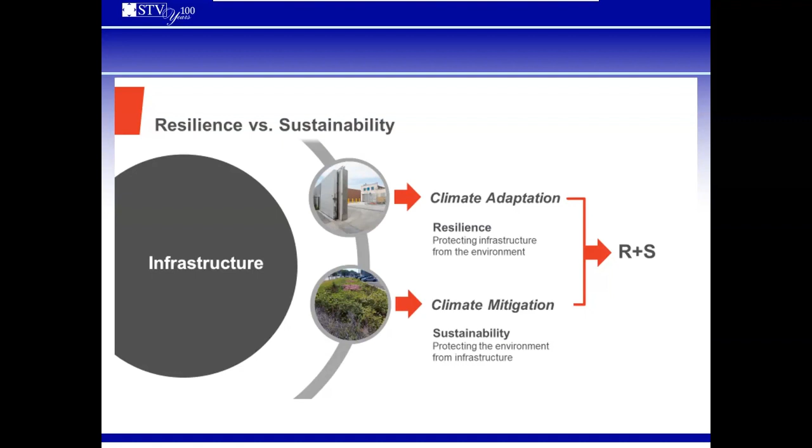That's what we'll talk more about today—that idea of sustainability, how we as engineers can design buildings to be environmentally friendly and have the least impact on the environment.

STV does resilient design. We're dealing with a variety of different issues we design for. Some are climate conditions, such as sea level rise, which is the most common one talked about now, tidal inundation, or drought. There's hydrological events—flooding is the one that comes to mind this year. We've seen massive floods throughout the world, and even in New York City we had recent flooding just a few weeks ago that impacts all of our lives. And then we had Sandy, Hurricane Irene, and Ida. There's been a lot of recent flooding and extreme events we should be designing resiliently to protect against—natural disasters, hurricanes, and you see much more fires recently.

There's also failures and emergencies—we deal with this quite a lot. Environmental contamination is a very common topic. Back in the 1940s and 50s, when an industry was manufacturing something, say paint or chemicals, a lot of times they would manufacture it in the plant, and that was the boundary of their system. Then they'd have a pipe that would drain the waste out of their system into a different system, like a river, which impacts us all. GE was guilty of this—they disposed, in quotes, of their waste, which was PCBs, polychlorinated biphenyls, a known carcinogen, depositing it in the Hudson River. That's a great example of environmental contamination.

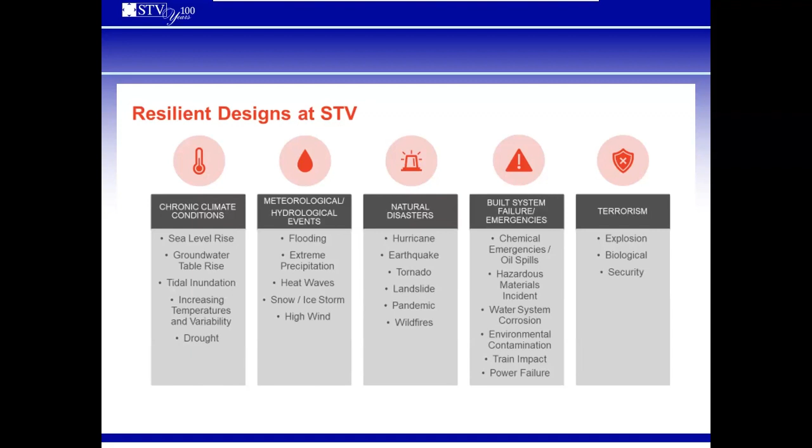And then, of course, there's terrorism. So resilient design is protecting our infrastructure—roads, bridges, tunnels, and buildings—against all of these different factors. Sustainability and sustainable design is designing for these topics too: designing for people, making sure there's good indoor air quality, that we're not exposed to chemicals within our buildings or tunnels. Energy—are we building buildings that are better insulated so we use less energy to heat them? And also buying renewable energy. Energy auditing is a very important factor.

I did this a while back—I got into energy auditing, and we would use various tools to quantify the amount of air exchanges a building had every hour.

So we would apply a negative pressure to a building by putting this big fan in the front door of a single family home, for example, draw the air out and measure the barometric pressure difference between the inside and outside, and figure out the number of air changes per hour, then assign a number to figure out how efficient the building was and how airtight it was. That's an example of energy wasted.

So sustainability also deals with the climate and wetlands. I have a slide about that, as far as how to protect wetlands, and that goes back to the sustainable idea, and back to regulatory compliance and permitting, which is the foundation of this whole topic of sustainability.

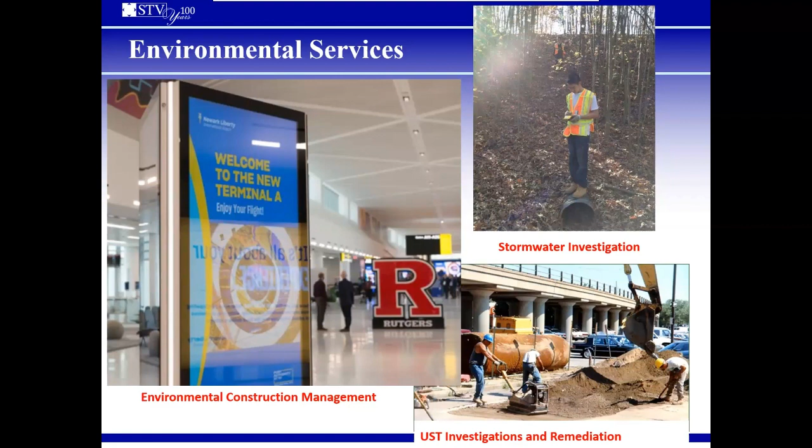So we did delineation of lead to figure out how deep it went in the soil, how far out it went, how far downstream it went. Very interesting project there, and then we advised them on how to clean it up and dispose of it correctly. We also do some work with underground storage tanks and remediation. I think it's a very interesting industry, and I'm still doing it, so it must be something good.

So we'll start off with the phase 1 environmental site assessment. This is the basic type of assignment that we get and advise clients on. We do a lot of this work for the New York City School Construction Authority - whenever they want to lease a new space, they ask us to go in and look for contamination and environmental risk.

Really, the way I see environmental issues is we're managing risk for our clients. And that goes all the way through everything, even sustainability. There's risk involved, there's always money involved, there's always time and schedule. And if you promise your client you're going to get LEED Gold, well then there's money and time associated with that you have to be careful of.

But phase one is the classic environmental risk analysis, and this is a way for the landowner, the property owner, to avoid getting sued under the CERCLA Act of 1980. The purpose is to identify recognized environmental conditions as they exist at the site at the time of the site visit, and to identify conditions that could have a potential to impact development and use of the site.

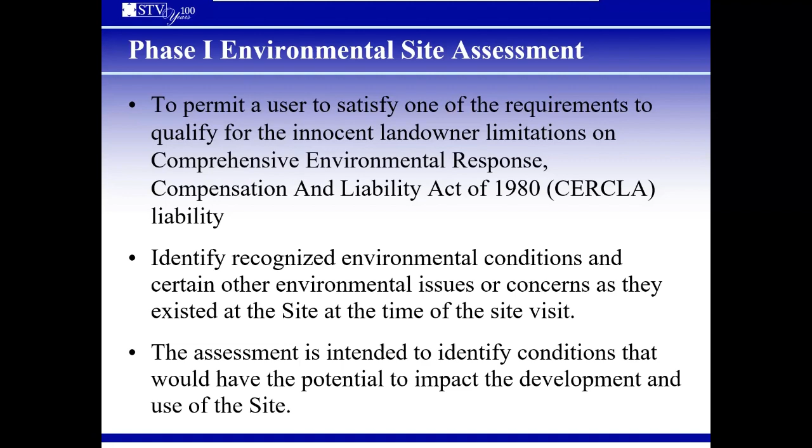If you like history at all, this is exciting because you get to look back - they provide you with maps going back from the present to the late 1800s. And New York City is full of interesting things.

The interesting thing here is that before 1970, a property owner could open up a gas station and it didn't take much permitting. There was very limited oversight, no checks and balances. So a building owner could just buy a tank, hook it up to a pump, and start selling gas.

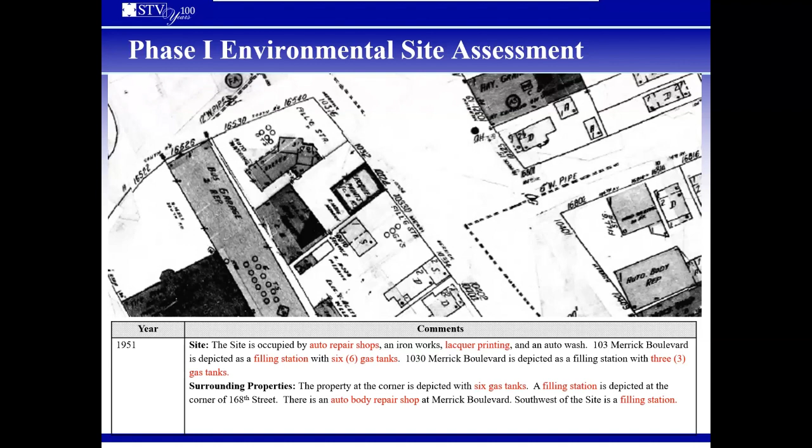You should consider doing additional sampling as far as a phase 2. So once we've identified those recognized environmental conditions, also known as a REC, then we would advise the client and make recommendations as far as what to do next. Typically, that would be a phase 2 environmental site investigation, which we're showing on the screen now.

This is where we then do some sampling. So we hire the drill rig and an operator. We show them where we want to collect the sample, and they drill down to whatever depth we think. If it's an underground storage tank, we might drill down beneath the invert, say 10 feet down. That's where the contamination would be.

They pull up the sample, we collect those samples, send them to a lab, have them analyzed, and figure out what type of contamination is there. Is it a petroleum type contamination in the case of a gas tank? If it was a dry cleaner, you could have all sorts of chlorinated solvents. Those are pretty nasty, and those things don't break down.

And also a lot of these contaminations, once they get down, work their way through the soil, then they wind up hitting the groundwater table. And the groundwater table, if it's pretty shallow, say 20 feet, once it hits the groundwater table, then it becomes dissolved in that groundwater, and it can go in any direction.

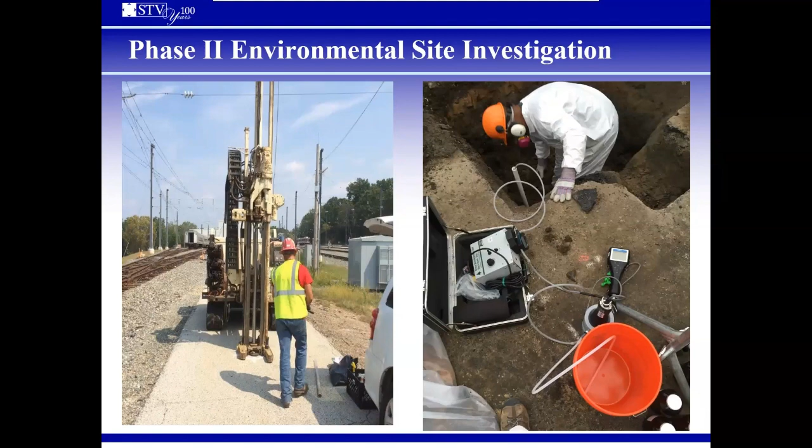And then after we've done the phase 2 and delineated the contamination, we figure out how far down it goes horizontally and vertically. Then we can figure out how to clean it up.

And typically, the most common way to clean up soil contamination is to dig it up, put it in a truck, and dispose of it properly. But we have to know what's in each truck. We have to dispose of it using the appropriate licensed transporters and disposal facilities.

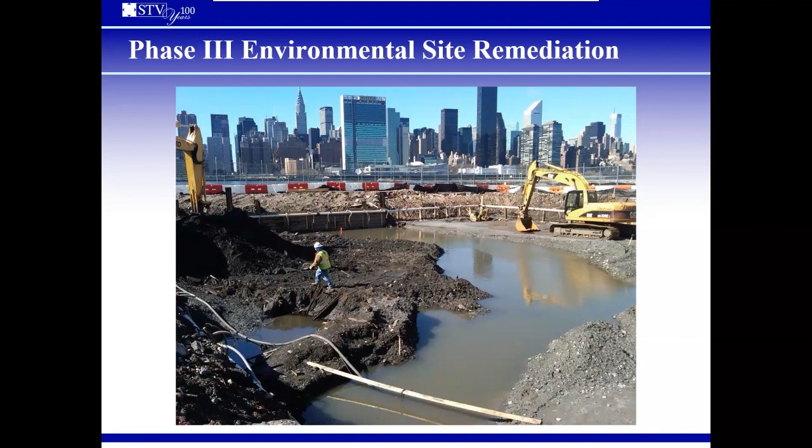So this is one of our sites in Queens, looking west towards the Chrysler Building there. So this is a typical outcome of that project.

So I'll get a little bit into the other types of work we do as an environmental engineer, environmental scientist, and that is considered part of sustainability.

Asbestos is a great material. It's naturally occurring. Believe it or not, there are outcroppings of asbestos in Staten Island. If you drive on the Staten Island Expressway and while you're sitting in traffic, you look to the left or right, you'll see a greenish type rock. That is serpentinite, which is asbestos. And it's also found underneath Manhattan. There's an outcropping there, and you may have heard other presenters talk about it as we built the 2nd Avenue subway and the 7 line extension.

They went through naturally occurring asbestos, and they had to take certain precautions for those tunnel boring machine operators. They had to wear personal protective equipment and take care of the spoils and dispose of it properly. So it was commonly mined, believe it or not, in the U.S. for years and years, and it was until recently mined in Canada.

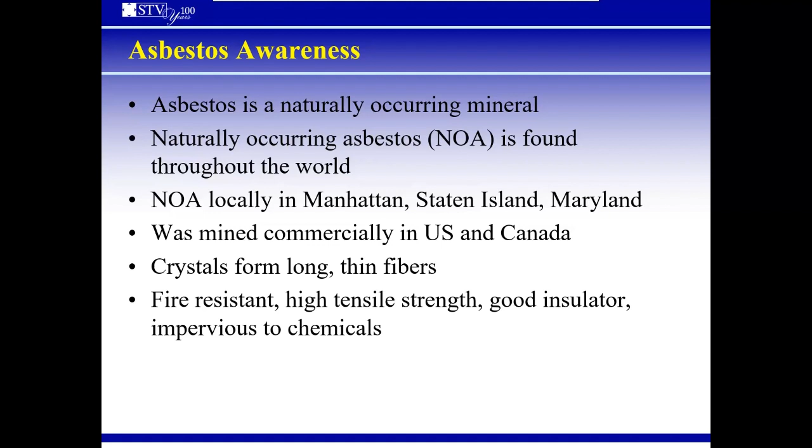I did a project recently in New York City, and there was naturally occurring asbestos in Staten Island, and we had to deal with it. So it's something you may come across in your careers, and you should just be aware of it. It does happen once in a while, and it's pretty simple to deal with. You use engineering controls. In this case, the engineering control is simply using water to wet it down and keep the fibers down so that nobody's being exposed to them as a worker and as a neighbor in the community.

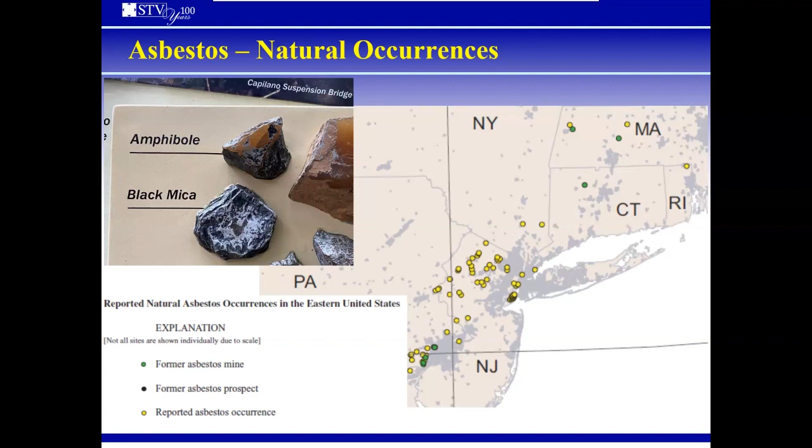The interesting thing is, as an engineer, I have to also educate my peers in my company. Everyone thinks it was banned, because in fact it was banned in 1973. The EPA realized asbestos is a carcinogen - if you breathe too much of it in, you're going to get lung cancer. And you see those ads on TV about mesothelioma. You got lawyers out there trying to have you call them so they can make money. That was because when people were exposed 30 years ago, there's a latency period, and now they're exposed and it's becoming a problem 30 years later.

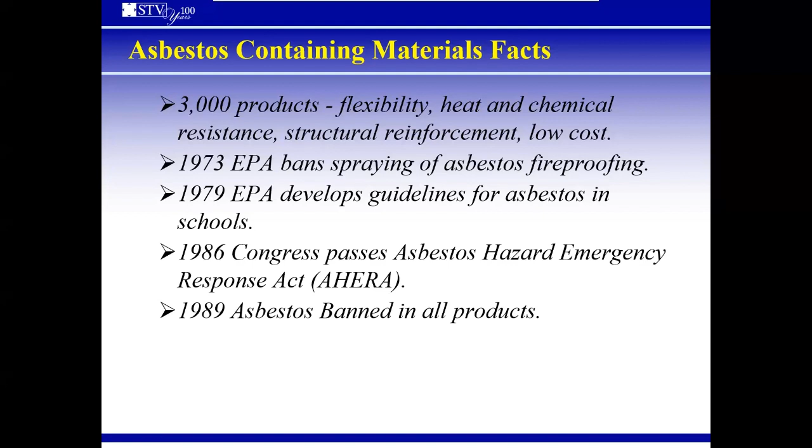Anyway, it was banned in 1973, but because of pressures, it was banned in all products in 1989. So everyone thought, well, that's the end of it, right? Not quite. In 1991, industry complained to Congress and EPA, and they said it's too difficult to manufacture products without asbestos - we can't manufacture brake pads and gaskets. So EPA said okay, we'll lift the ban for certain products, and these are the ones.

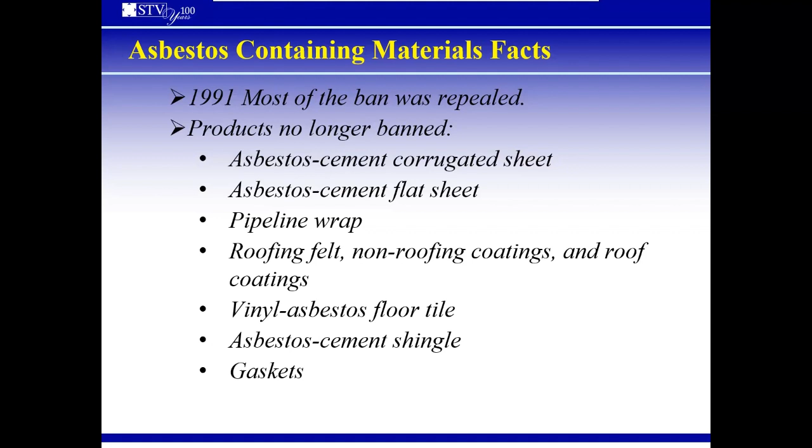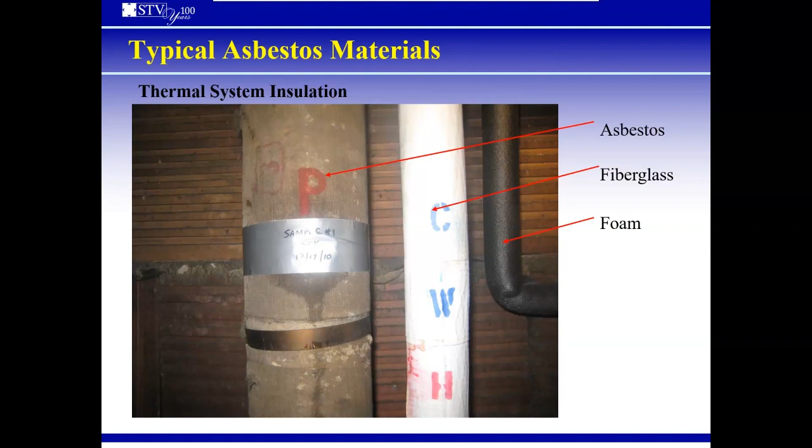This is interesting. So we did a project called the Avenue School, a brand new school on 10th Avenue in Manhattan. And we did a phase one, which I talked about earlier - it's environmental due diligence, and part of that is a site visit. We ask questions: are there any underground storage tanks, and are there any asbestos? They said no to both. There's no underground storage tank, no asbestos. And they said, well, there might be a tank right here, but it never leaked. It's fine, the boiler always worked.

So once we opened it up, we found that they had done an asbestos abatement project. They had removed asbestos from beams and other things. And then we found there were bags and bags of it inside of the oil tank, which is obviously very illegal for many reasons. They illegally disposed of the asbestos, probably contaminated the building. And then we had to properly dispose of it. So this is the type of thing you might encounter on your project.

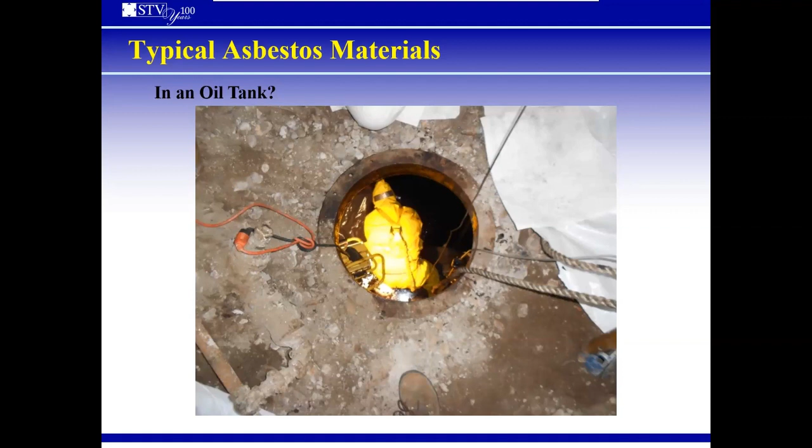This oil tank, by the way - the building owner claimed it never leaked and his boiler always ran. Well, sure, some of the oil may have gone from the tank to the boiler, but a large amount of it leaked out of the tank underneath his building, underneath the sidewalk, underneath an adjacent building, creating all sorts of environmental issues. We had to get the DEC involved. We managed cleanup of the contaminated soil within the building, and they allowed us to abandon the rest and leave it out there for the next person.

In this case, we would need, assuming that the negative air unit fan and filter is only 50% efficient, because the rating says, I don't know, 300 CFM, then once you put the filter in there and have the duct hooked up to containment and the loss of efficiency in those bends, you're looking at 50% efficiency of that fan. So if we use that calculation, we would need to pull 106 cubic feet per minute, and therefore we spec'd out a 110 CFM negative air unit for this particular case, to make sure it was designed properly. That's an example of a simple design that we do, something you may be reviewing in your career someday.

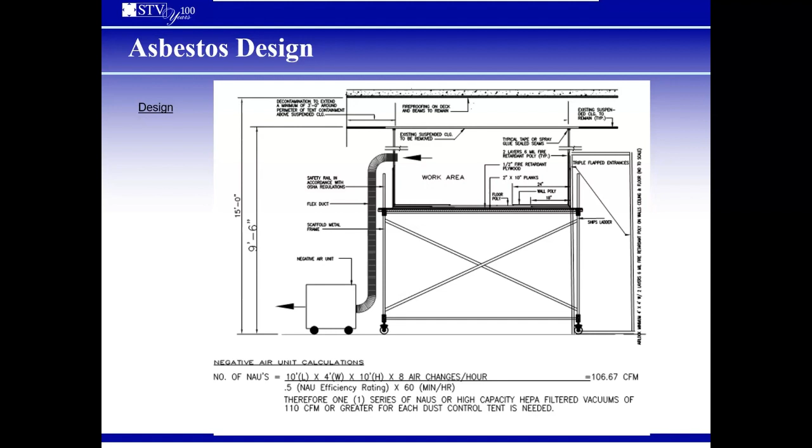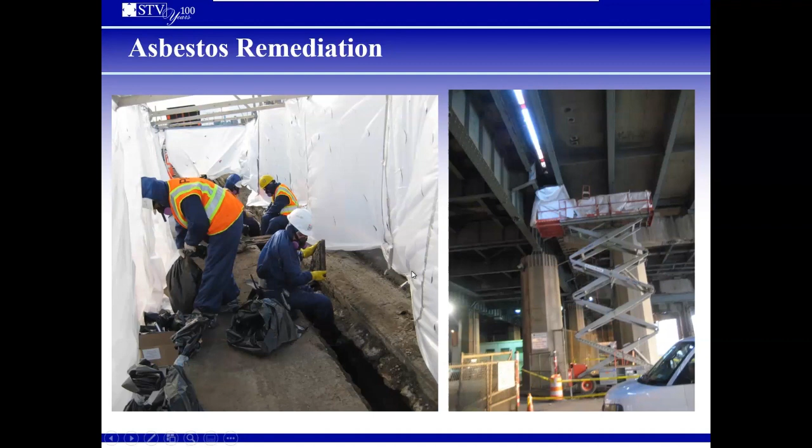So the reason I bring this up is because asbestos is related to LEED, and after you complete your design, your abatement, then you would take that documentation, your survey report, your design, your abatement documentation showing that asbestos was removed, air samples were taken. You submit that report to the U.S. Green Building Council, and that would be considered a point on the Sustainable Sites Credit 3 for brownfield redevelopment. So it's part of LEED, and this is what we did for this project, specifically for the Newark Airport project. We did submit our documentation and got 1 point there.

Lead containing materials, another once considered a great building material. It's had many great attributes. It was relatively cheap, relatively local. We mined it here, mostly in Colorado. You've probably heard of Leadville, Colorado, which is now considered a Superfund site. And once it's mined, it's easy to melt. It melts at a low temperature, meaning it can be easily formed into products, everything from fishing weights to, most commonly, lead pipes.

I saw a very, very interesting movie over the weekend called Lead and Copper, and I highly recommend it to everyone, because it talks about Flint, Michigan, and all the mistakes. A lot of mistakes were made by engineers, by government officials, Department of Environmental Quality, politicians, and just the whole 2 hours of lessons learned, what not to do, and the consequences. These people lied and falsified data, and they basically exposed 100,000 people to lead in water, including children and babies. It was a horrible outcome.

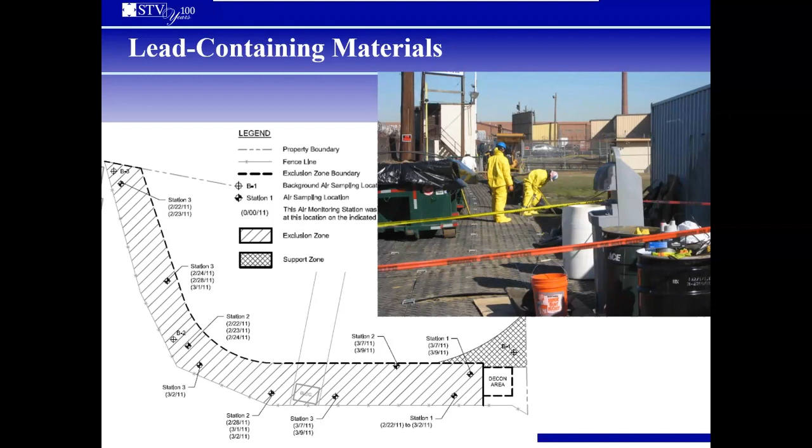We took samples and it was definitely high levels of lead in the exclusion zone. Then you had a decontamination area where workers would come out, wash their hands, make sure they were clean, take off their Tyvek, and dispose of them properly. The support zone was where you would store the waste. Beyond the yellow was the exclusion zone, and between the yellow and the red was the decon area. It's not every day that you have a project set up textbook perfect, but this one I feel was a very good example of how to do a project the correct way.

We did air sampling, because when the contractor was digging up the foundations, they were stirring up a lot of dust. We wanted to make sure that the workers and the public just beyond this fence, kids walking to school, were not breathing in lead dust. We didn't want to add to the problem. We collected samples using a small pump drawing in air at between 1 and 4 liters per minute, which is the rate at which we breathe, with a small filter attached to it. The pump draws the air across that filter.

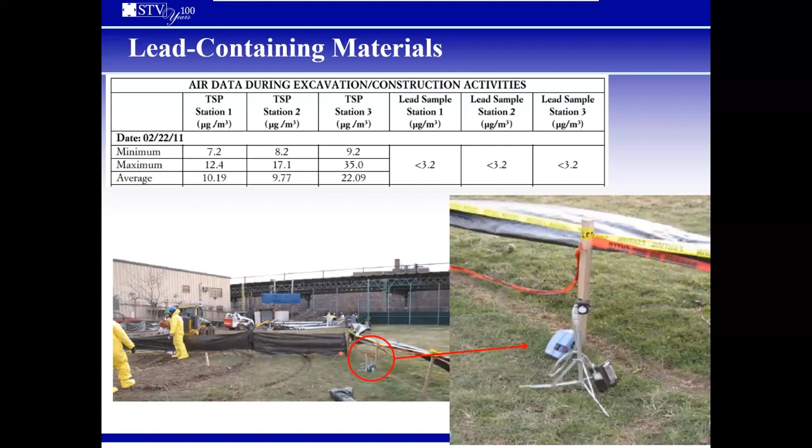We send it to a lab, and they analyze it for TSP, total suspended particulate, measured in micrograms per cubic meter. We had 3 other stations monitoring for lead only, also in micrograms per cubic meter. The lead level was very low, below detection of 3.2, which is below the OSHA action level of 30 micrograms per cubic meter over an 8-hour period. And TSP, I can't recall offhand, I think it's 150 micrograms per cubic meter for total suspended particulate. So this one was done well, no significant amount of lead or particulates in the air.

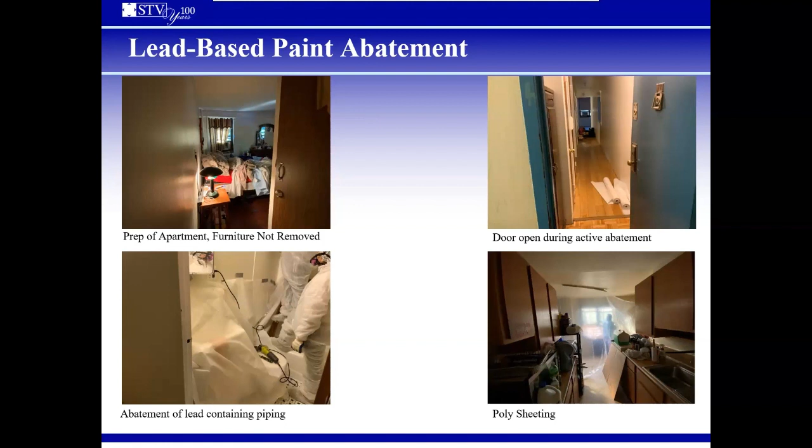Other examples, there's a lot of lead in paint, and we do consulting and advising to property owners in the city. Here you see a few examples of how it's being managed. This one's a good example, abatement of lead-containing piping. You see all the plastic sheeting here, they're probably removing it from the wall or something like that. Again, you see poly sheeting to delineate the work area from non-work areas. This is a lot of labor to remove all that lead paint from buildings. So let's keep going here.

Mold contamination, I would consider part of indoor air quality. A lot of old aging buildings have various problems that create mold. Mold needs several things in order to live. It needs a substrate to eat off of. Basically, mold is a living organism that needs carbon to thrive on, so it lives on the paper backing of sheetrock, ceiling tiles, glue on the back of drywall, and wallpaper. Here you see one of our team members taking moisture meter readings to determine if the leak is still active. This would contribute to indoor air quality if it were a problem in the building.

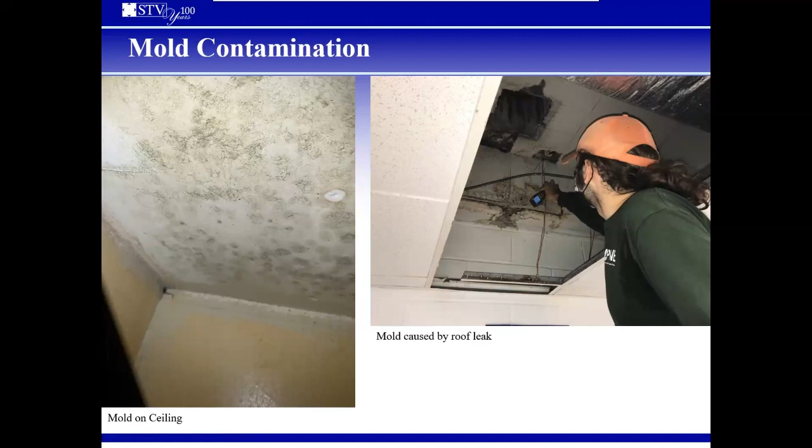Soil vapor, we talked a little bit about it earlier. Industry could off gas, or dry cleaners are notorious for leaking chlorinated compounds into the soil, which get into the water. These compounds are common: tetrachloroethylene known as PCE, trichloroethylene, benzene, toluene, ethylbenzene, and xylenes, BTEX as we call them for short, and methane.

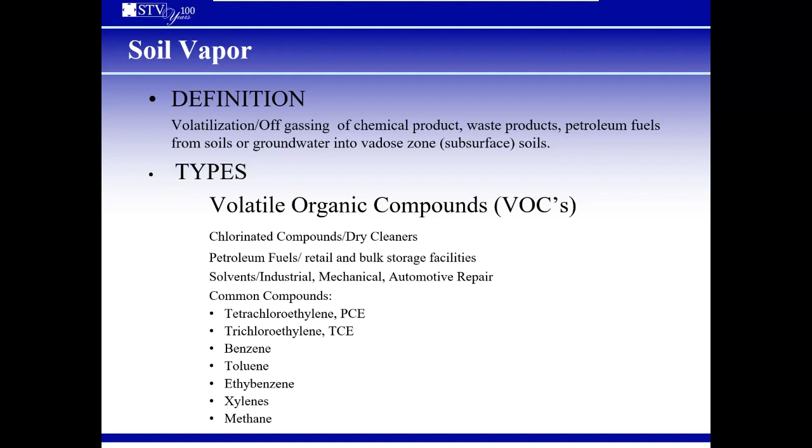So again, we're back to Newark Terminal A, favorite project. This project here, design build, we've worked on it for 6 years, recently finished. Our goal was to promise the client we would get silver, but we actually went above and beyond and were able to attain gold, a higher level. My colleague Peter Berger is an amazing engineer, he managed this whole process as far as LEED certification to attain that. The consultant credo is under promise and over deliver, and this was a good example of that. So remember that if you remember anything: under promise and over deliver.

So here we'll talk about a few of those LEED credits. This first one, here you see a rendering of the facade, the west facade of Newark Airport, and on the right-hand side, the annual incident solar radiation levels. The idea is we want to design the windows and insulation to reduce the heating and cooling load within the building. If we can provide very high insulation on windows and walls, we can spend less energy heating and cooling the building itself. That's very important, it seems very simple, but it's important to know.

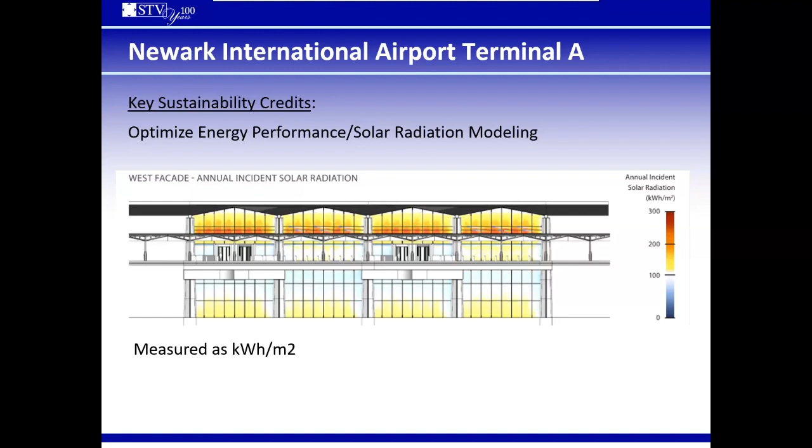For this one, we most likely relied on the mechanical engineers who do the energy modeling. We asked them to figure out heat loads and cooling loads and what type of energy is required to run the HVAC to attain that. Now my area of expertise, I'm more of an indoor air quality and hazardous waste materials engineer, and I deal with asbestos and lead more. So it takes a team to figure this out. Anyway, I thought that was an interesting example of the type of LEED points we attained on Newark Airport.

This is another one, the heat island effect. You see a photo drawing here of the airport, color coded on the right-hand side showing the solar reflectivity and reflectance index of each part of the building. It's important to design the building with low... we want high solar reflectance, so the sunlight bounces off the top of the building and isn't absorbing a lot of heat. We want to use materials with high solar reflectance. In the bar chart, the lighter the color, the higher the solar reflectance. Again, trying to get the most points possible at the lowest cost, designing that within budget.

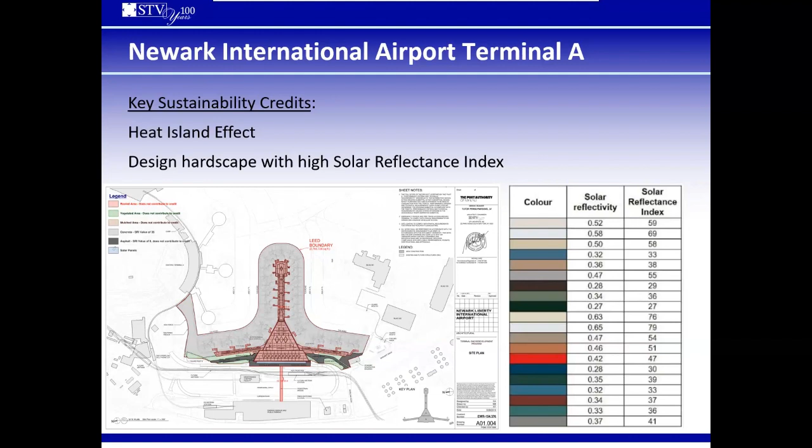Also, combining that with the architect's concept, there's always a struggle between the wishful thinking and beautiful design of the building, and the reality of what we have to implement as engineers and how to attain that. It's a constant struggle and conversation on what's the best way to do it. Luckily, there's a lot of brilliant engineers out there who can mostly make it happen.

Doug, yes. 5 more minutes.

Okay, so here again it's a balancing act between meeting the LEED points and getting it done quickly. Just an example: because of the fast turnaround time, these 45 samples cost about $50,000 to get done. We managed to do it, we got the LEED points, but it's very expensive because of the fast turnaround.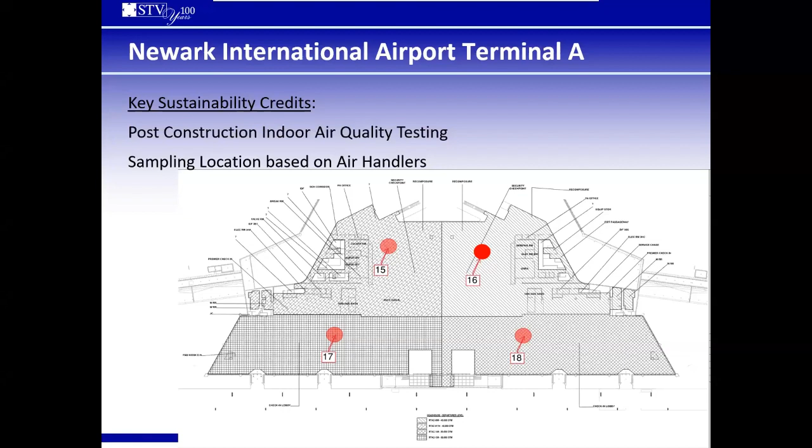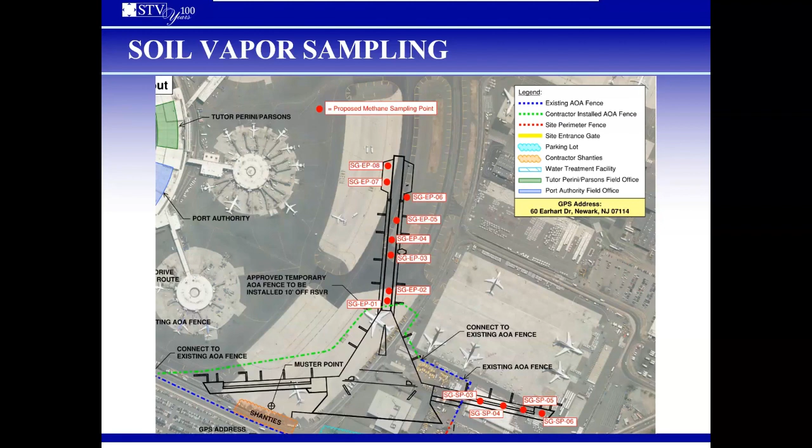A couple more. There was also methane at this site, so we had to collect subsurface samples to figure out where the methane was located. Then our team designed a subsurface depressurization system.

Here you see us taking the samples. There's a small canister, this is a Summa canister, and it comes to us from the lab under negative pressure, so the lab draws all the air out. Then when we get it to the field, we drill a small well into the ground, stick the tubing down there, open up the valve, and suck the air into this canister and send it back to the lab. That's how we measure methane in existing soil, in situ sampling.

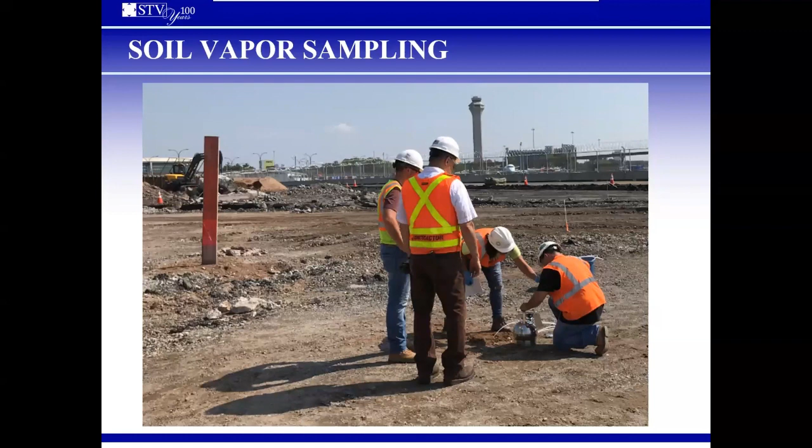Here you see we had to set up piping underneath the building in order to vent the methane out of the building, exhausting it above the building out into the air.

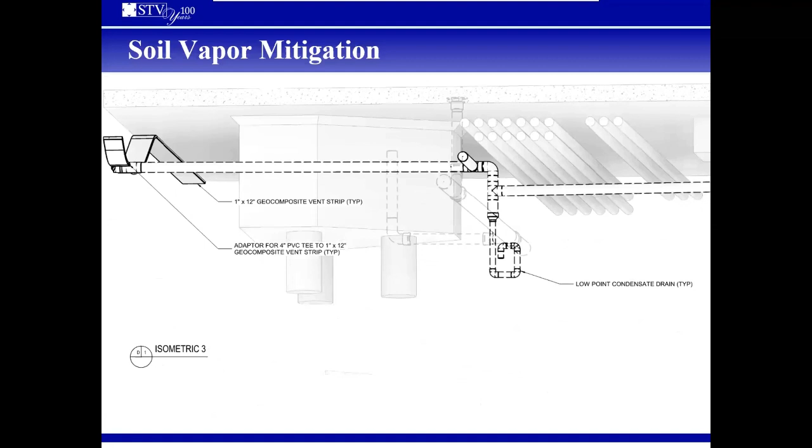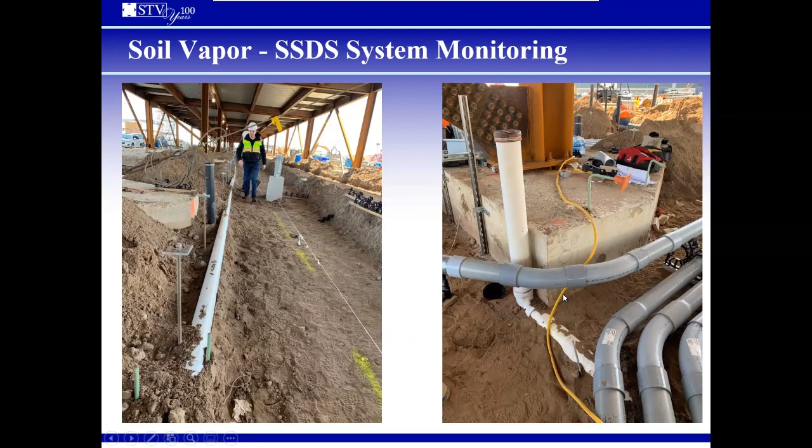Here's some design of that system, and another design close up. Here's the construction phase, our engineer inspecting the PVC piping to make sure it's all set up. The difficult part is making sure it doesn't conflict with every other system, so luckily, I'm sure you're learning about BIM and modeling, which is very important so that those pipes can go in. I was lucky enough to do one of the inspections, testing it to make sure it was pressurized properly.

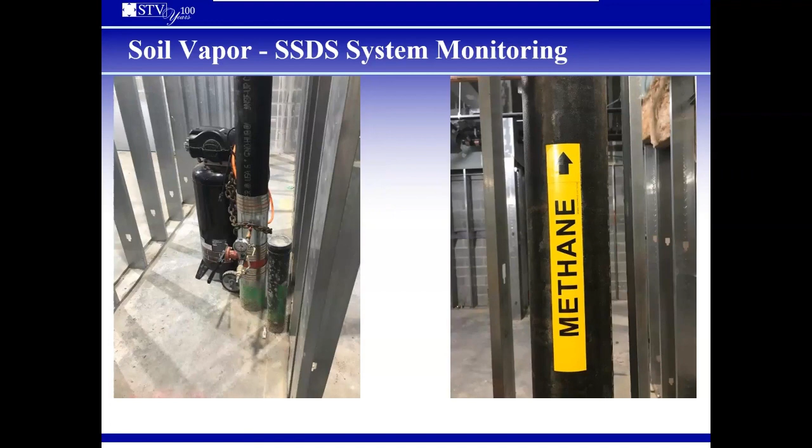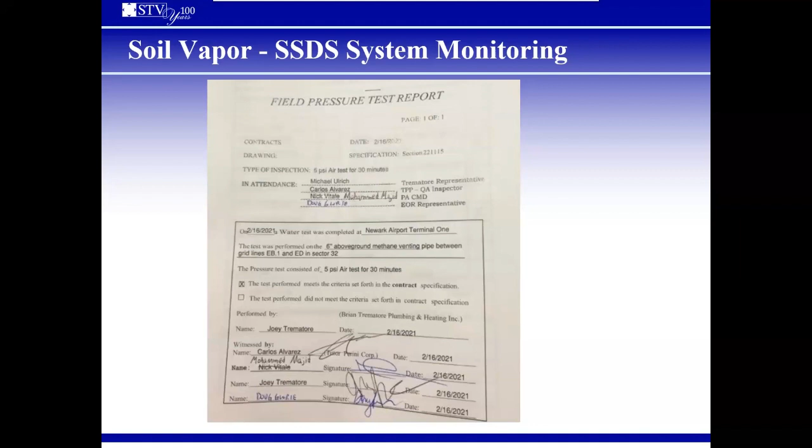Here's a few photos of the final product. This is something that, as an engineer, you might be doing the field pressure test report to sign off saying that yes, we saw it, we turned the valves, we made sure that the appropriate pressure was being used.

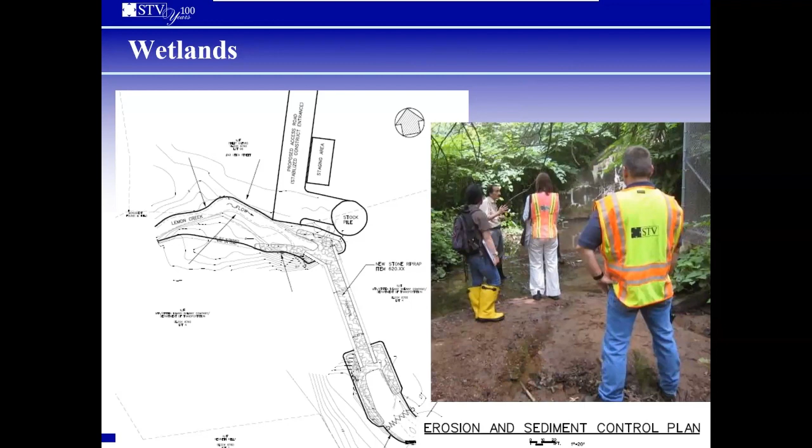Lastly, I'll wrap it up with green buildings. The Green School Guide is similar, there are a lot of different sustainability systems out there, you have LEED, you have Envision, and the Green School Guide is another one that we use.

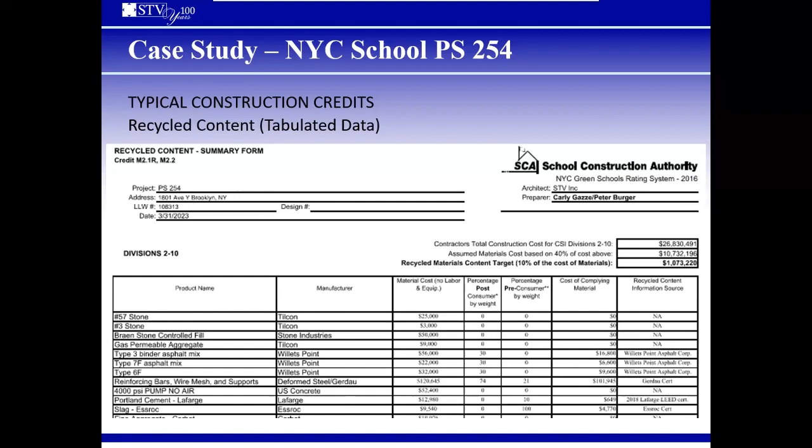Here we're sort of accountants in this case. We're managing, figuring out what type of stone is used, what type of rebar, how much of it, what it costs, and we're accounting for all that. At the end of the day, we report it to the SCA and the Green School Guide to get points to ensure that the building is sustainable for recycled content, which is one of the different metrics.

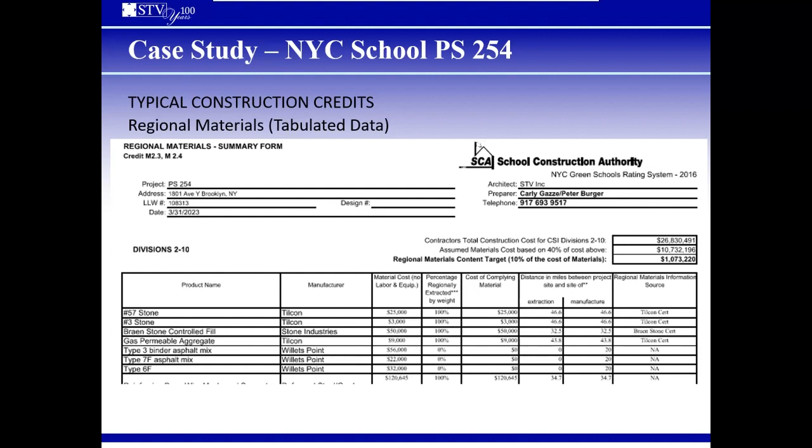Regional materials, I explained that a little bit earlier. It's easy to get materials from anywhere, but a lot of times they come from overseas. Italian marble comes to mind, easy to get, but could you replace that with something locally sourced? Another one you've probably heard of is certified wood products. These are products where the forest is managed, not clear cut. They use selective cutting, they maintain the forest, they replant, they make sure there's no soil erosion. That's the type of wood product that we should be using and designing for.

I think that's it. Did I make it in time? Yep. Okay, almost, almost. Whew. All right, close. But that was...